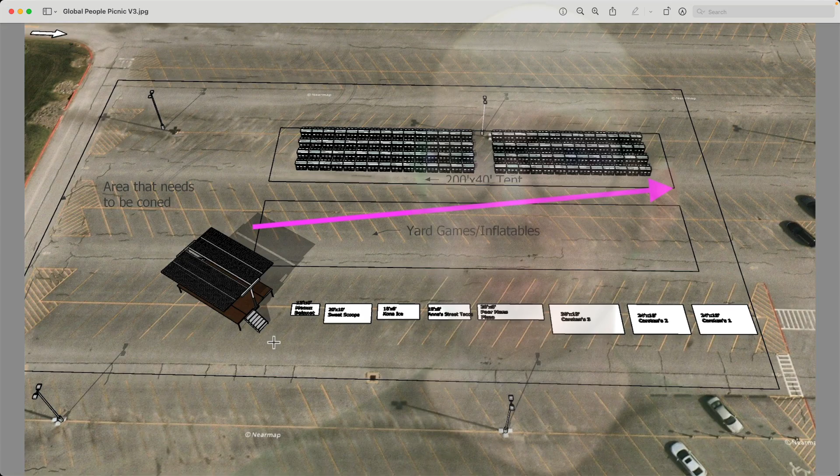Okay, so let's talk about this show. So I was in Bentonville, Arkansas. We were in this parking lot, and I basically had a narrow range to cover. So this will explain some of this right away. So here is this area where it says yard games. This is the area we pretty much need to cover. And in general, they told me they wanted to stay out of this area because this is where people are ordering food, and there could potentially be a lot of people that are English as a second language. And so they wanted to keep sound off this area.

Here's the stage, obviously. And then I think they also kind of wanted to leave this area without too much sound. Number one, because there's a big canopy covering it anyway, so it'd be hard to get sound in there. And number two, because people are in there talking. So really, this was the main area to cover, right? This strip. So hopefully right away that sort of explains to you why I went with one big long line array instead of two, because I just have this one strip to cover.

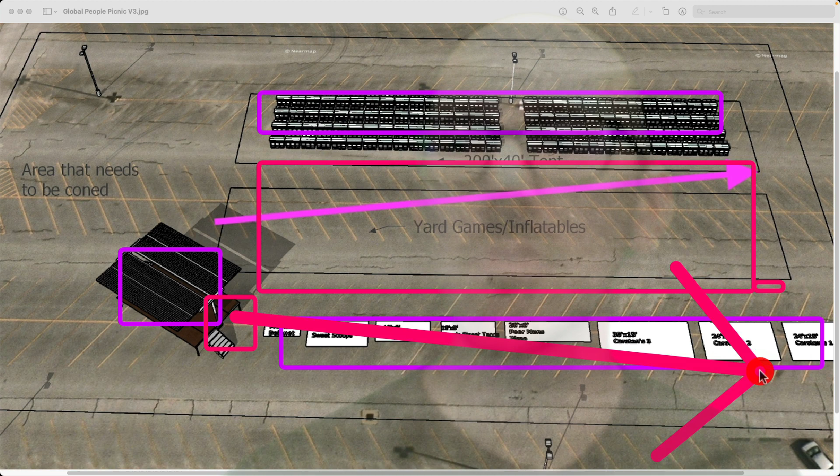Like, I'm not going to put a line array over here and cover this area where there's no people, or over here where there's no people, because we want to avoid that area. So instead, one big one. And if I had two, I would have had to sort of cross them across each other, and that still just makes it too wide. So that's why I went with the single line array.

Now let's talk about the subwoofer array. I was excited to get a chance to try a horizontal array again. I hadn't done it in a while. I almost always go with a gradient array for various reasons that I think I've discussed in other videos. But with this one, I thought a horizontal array would be helpful. With your cardioid arrays, you're sort of limited, in my experience. There are some different variations, but with your gradient arrays, like I like to use, you're sort of limited in how narrow you can get.

But with your horizontal arrays, you have a huge amount of flexibility with the coverage shape, right? Now there are some other drawbacks, but this is what I was initially thinking. Let's try a horizontal array. Let's see if I can just cover this strip. Won't that be cool? Ultimately, this became a problem, but actually, let's just talk about that now.

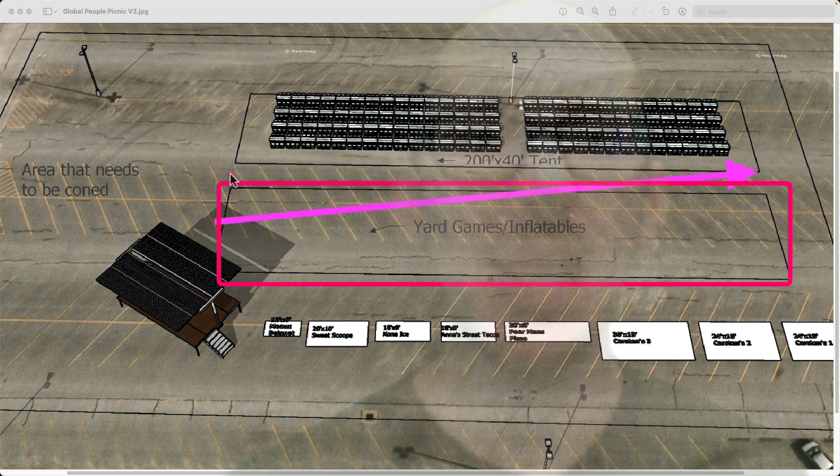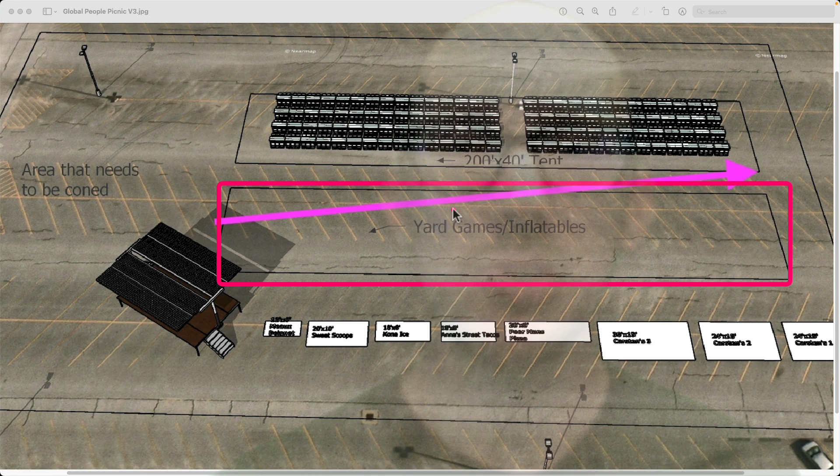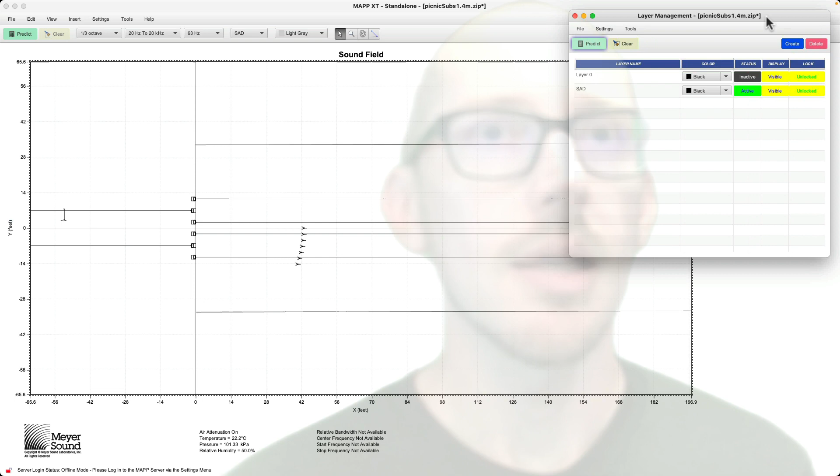So long story short, I'll tell you where we're heading with this: I was able to hit this target coverage shape with my subwoofer array, but of course my main array isn't this narrow. It's a 100-degree array, and so let me just right away give you an example of what that might look like. So here in MAPP XT, oh, I guess I deleted it. So let me just put in a 100-degree speaker.

So if you insert an individual speaker and you go all the way to the bottom under the discontinued products, then you can find a Melodie. Where is it? Legacy products, right? And I don't know why it's rotated like that.

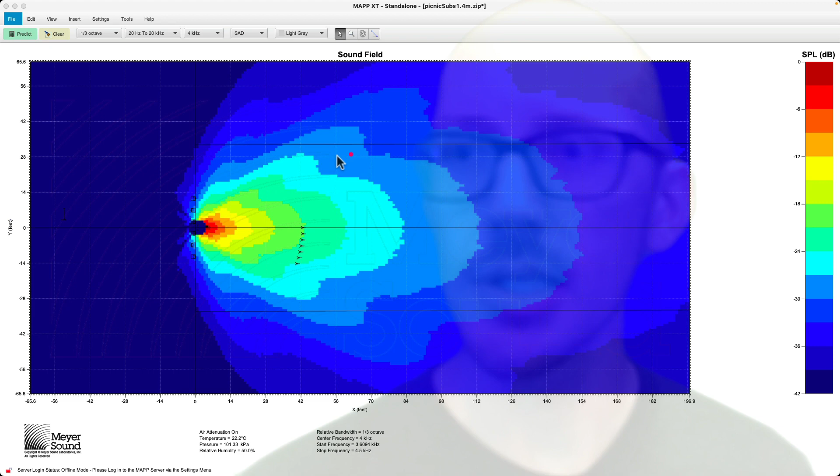So I put that in, and if we just hit predict real quick at 4K, then you can get a sense of what a 100-degree speaker might look like against this coverage shape that you see defined here by this rectangle. So if you look all the way here at the end at 200 feet, and then you look at this color of blue, and you head out this direction, it's covering way past these lines, right? So if you imagine that this is the shape here that I'm trying to hit, we can see that this color goes all the way out here.

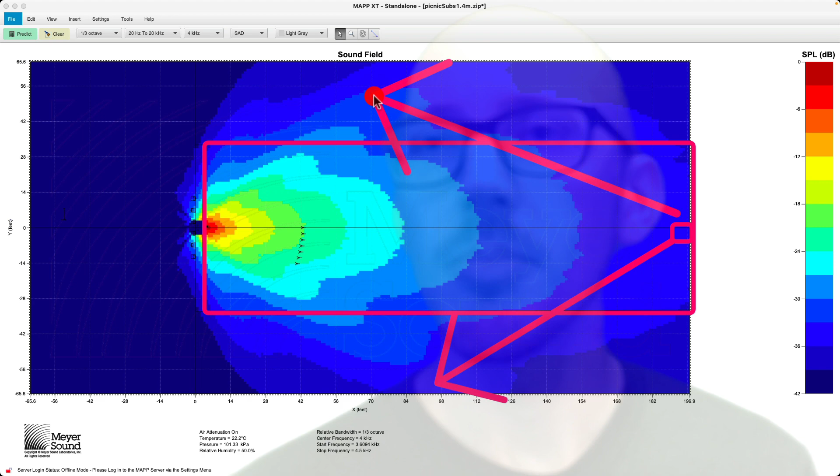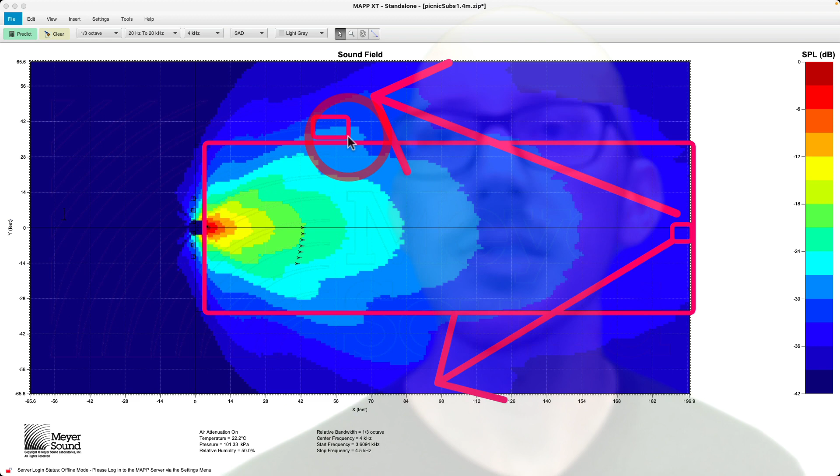And now keep in mind that I ended up having to put front of house over, I can't remember exactly the depth, but I think it was like over here somewhere. So I'm still pretty much in the coverage of the mains here, right? Not so with the subwoofer array. So I thought this subwoofer array was such a cool idea, and it did end up working out, and I'll just give you a quick demo of that. So let's go down to 63 Hertz.

So this was really cool because I was able to not only hit this shape, but also just experimented with turning around two of these subwoofers and making it a gradient array, you know, in landscape mode. And I thought it worked pretty well because the stage ended up being right over here. And so a big portion of the stage here ends up being in this cancellation area. So that was great, but the shape was so nicely fit that then when I was over here at front of house, I couldn't hear the subs at all.

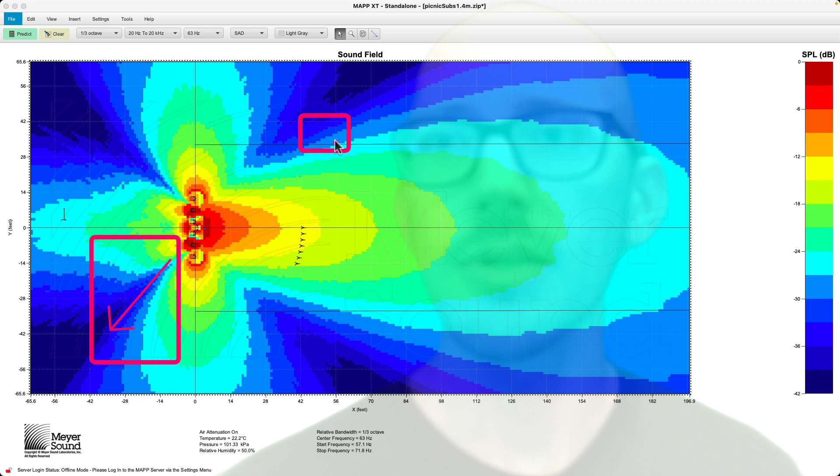And right now we're just looking at 63 Hertz. So you can imagine as we go up in frequency, it's going to get even more narrow. And so it ended up being a really tough day for me in terms of mixing because I couldn't hear the subs at all. So it sounded totally different if I would walk over here into the coverage area. It sounded really good. It was really nice. And I did have an iPad and I would do that occasionally, but the rest of the day standing over here, I just had to know like it didn't sound quite right.

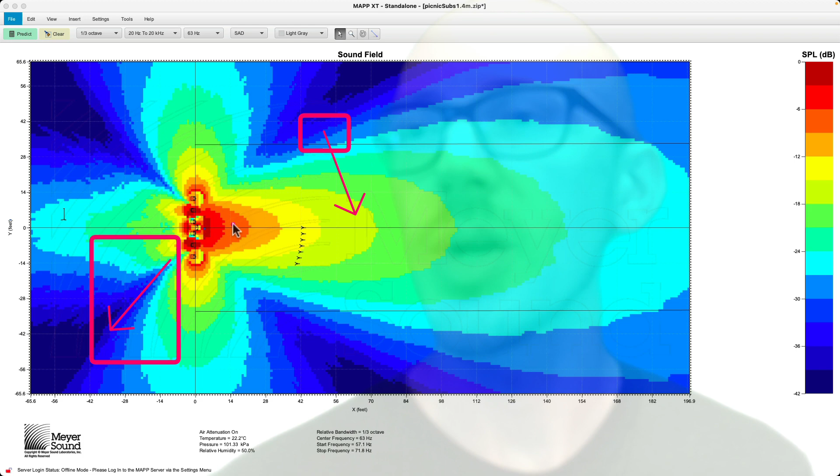So the moral of the story is that yes, I was able to hit my coverage area here with this particular loudspeaker array, this sub array, but it didn't match the rest of the system. And subwoofers don't exist in a vacuum, right? They have to connect with the rest of the system. And so, as we saw earlier, my main speaker array was covering farther out to here. And so over in this region, the whole system starts to fall apart because we're not covering both the subs and the mains in the same width.

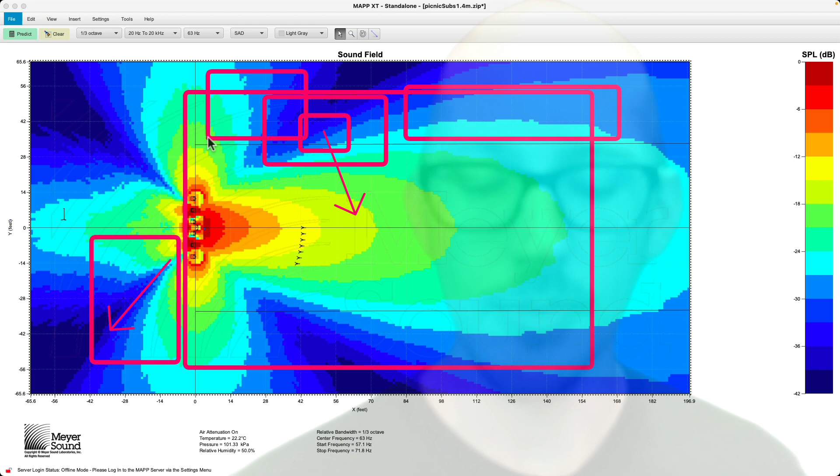Okay, so that was probably the biggest, most obvious thing that sort of went wrong for me that day. But let's walk through how to design the subwoofer array and you'll see where I did some other things wrong. So let's open up Merlijn van Veen's subwoofer array designer.

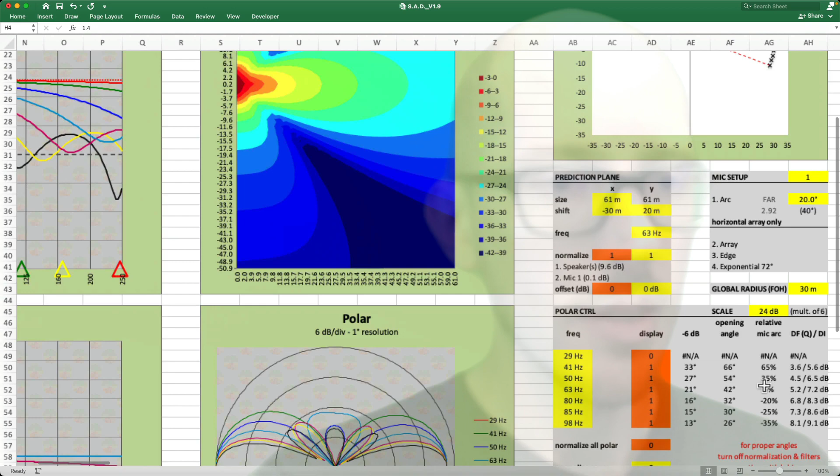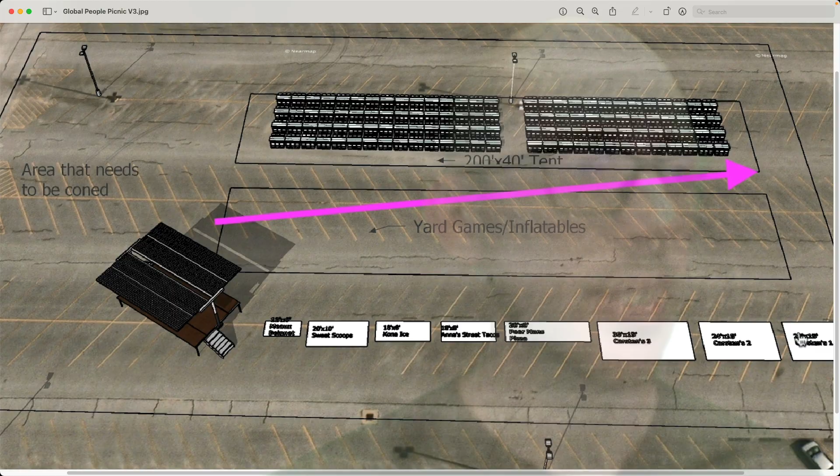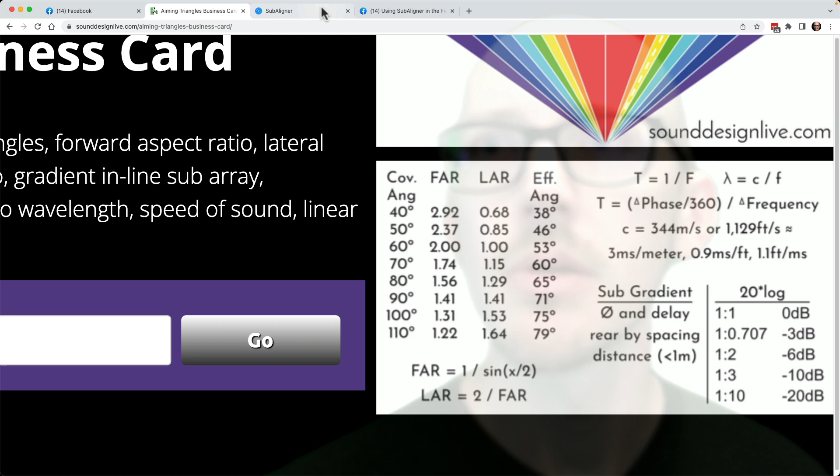Why isn't this the whole story? Well, what's going to happen later when I turn this subwoofer up, right? So if I turn the subwoofer up 6 dB like this relative to the main and create like this haystacking effect, this is the plot in Subaligner, by the way. This is not the same subwoofer, but it's similar. So this is just illustrating a story here that if you turn the subwoofer up, of course, then relative to the main, more of these high frequencies will be exposed. So although the operating range says 100 Hertz, I'm exposing more of those here. And so we're still going to be hearing these. These are only 6 dB down in relationship to the main.

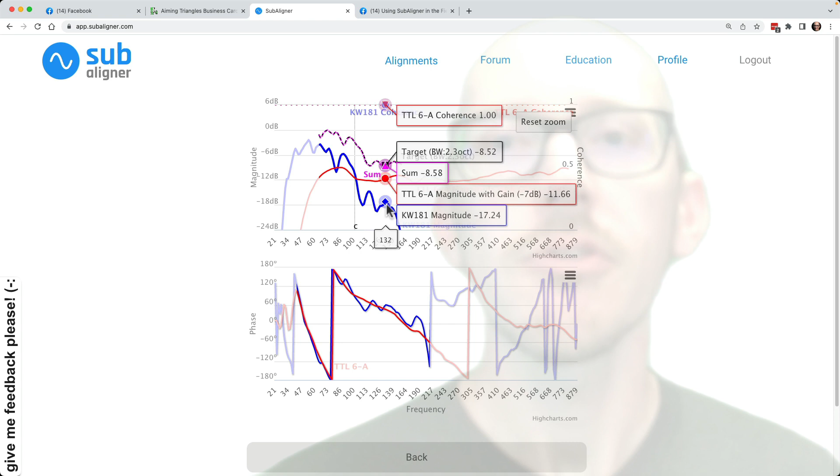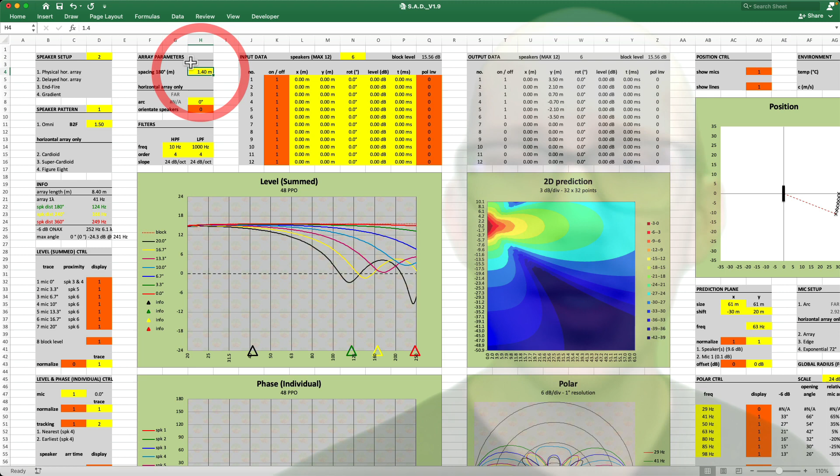So this is another thing to consider when doing these designs. How much are you going to turn up the subs when you actually get into the field? And therefore, do you need to consider higher frequencies in that subwoofer array? Okay, so I need to zoom back out so we can see everything here. Now, I'll just give you a quick demo. Let's say that this started at 1 meter. And then down here, I can see that 63 Hertz says it's too wide relative to the mic arc, 50%, positive number. So I start going up. 1.1, I'm still looking at this number down here, 35%, so I'm getting closer.

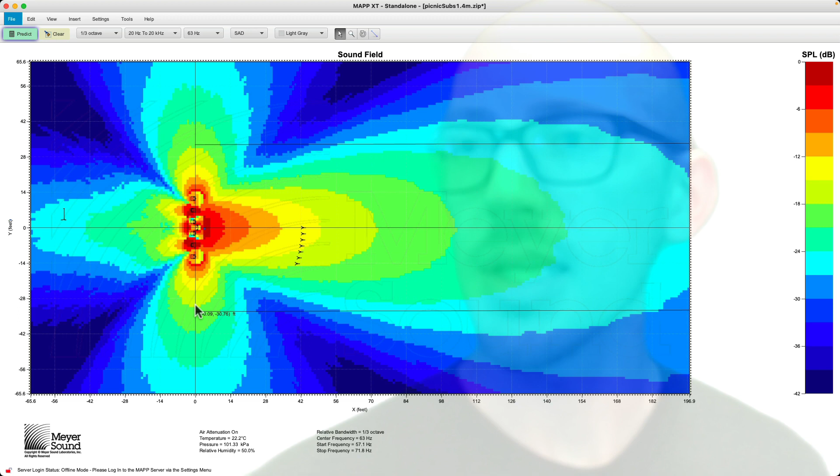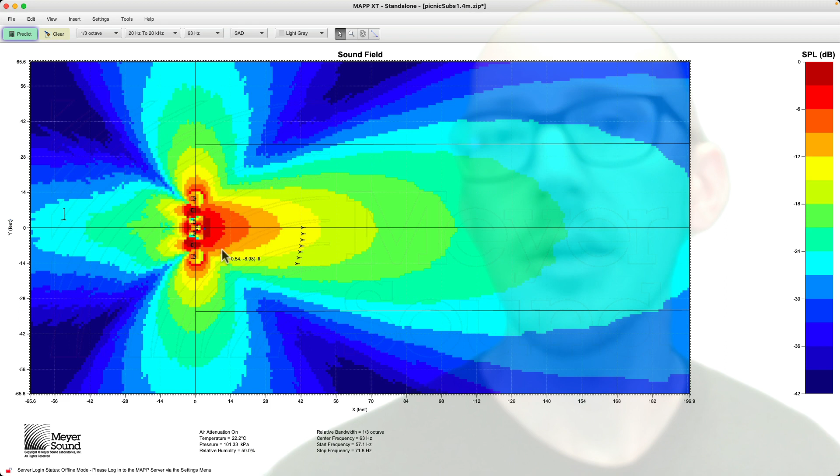1.2, 1.3, I'm getting closer. 1.4, 5%, really close now, 1.5, and I've gone over. So it's in between 1.4 and 1.5, so 1.45 is right on the money, 0%. So I've perfectly matched 63 Hertz. And so I'm thinking, great, so this is where I went with my design, and then I exported this, imported into MAPP XT, and I saw that it worked, and then I started experimenting with turning these subwoofers around and trying to combine an inverted gradient stack here. And this is what I deployed in the field, and I've already sort of talked about the results.

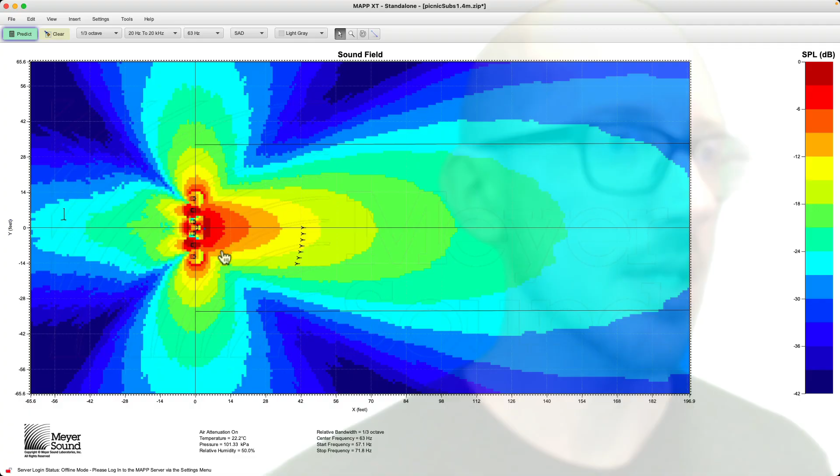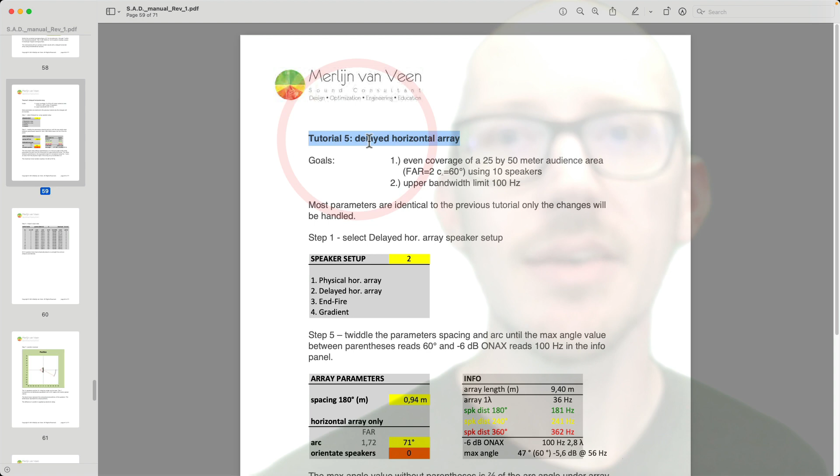So let me go back and show you how I could have done this a little bit better in Subwoofer Array Designer. So where I typically make mistakes is when I try to go too fast. Some of you may be familiar with that as well. So if I had actually opened Merlijn's guide here, tutorial 5, delayed horizontal array, I would have discovered the mistakes I was making. So let's go through this together so that if you ever have to do this, maybe you'll avoid some of the same mistakes I made.

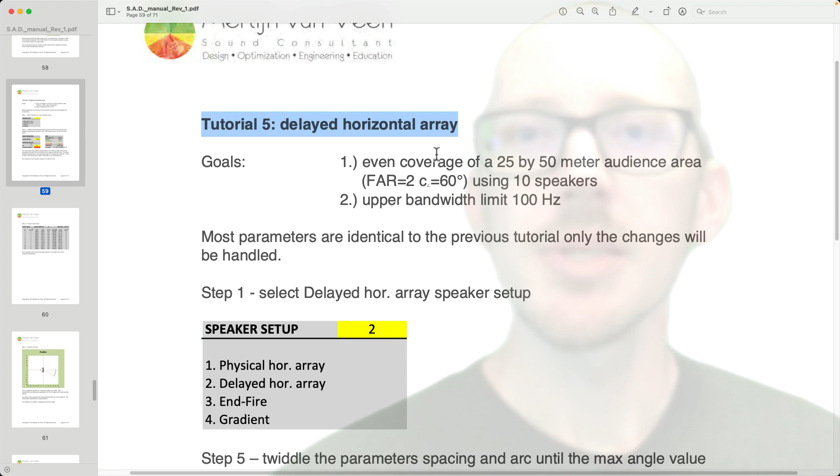Okay, so he talks about forward aspect ratio. We did that already. I know I'm going for 40 degrees, forward aspect ratio of 3. My upper bandwidth is also 100 hertz or 98. And we talked about how that's relative to how much I turn the subwoofer up later on. But let's just go with 100 hertz or 98 hertz now, so I think I went with 98. Just to move along with the video here.

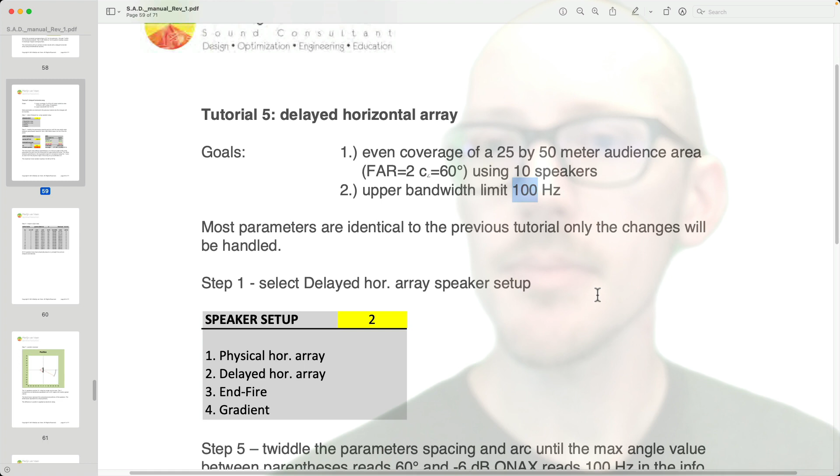Okay, so yep, we selected number 2, delayed horizontal array, and then adjust the parameters of spacing and arc. So this is the part that I skipped. I forgot that you could adjust the arc, because in my mind I'm thinking this is a delayed array, so there's no physical arc, but of course when you select delayed array in Subwoofer Array Designer and then introduce an arc, it just adjusts the delay times.

It doesn't actually make a physical arc, but I forgot about that. And then adjust that until this number is 60 degrees and this number is 100. So in my case, I need to look for this number to be 40 degrees and the other one to be 98. So back over here in Subwoofer Array Designer, that's what I did. So let's start with 1 here again.

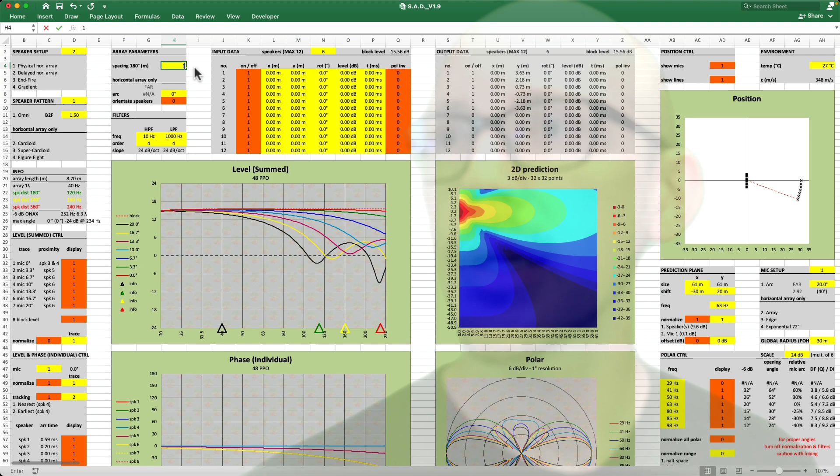You notice I'm starting with an arc of 0. And now I can zoom in more because we just have these boxes right next to each other. Okay, so I'm looking at this number, 0 degrees, and this number, 252 hertz. So let's start turning this up, 1.1. And so I see that this number doesn't change at all, so I need some arc in here, right? So 10 degrees. Okay, there's 14 degrees.

What am I heading towards? I'm heading towards 40 degrees. So let's go ahead and put 40 degrees in. And there we get really close. And now let's start adjusting this some more because we want to head towards 98 hertz here. I'm going to go ahead and jump up to 2 meters and see what happens.

Not always the best idea because you want to see these things change, see how they change as it progresses along. So it actually makes more sense to go like 1.5 and then 1.6 and make sure you don't somehow jump over the target you're looking for. But I played with this already, so I'm sort of just saving us some time by jumping ahead.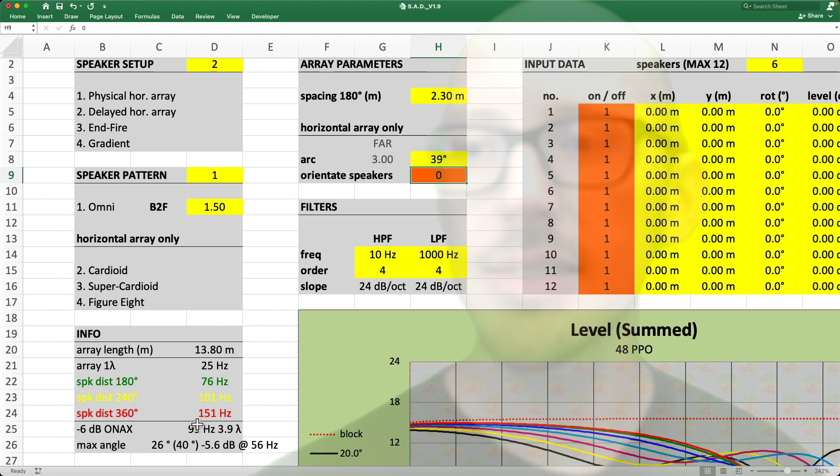Okay, so we're getting closer to 98 degrees. 2.1, 2.2, 2.3. So there's 2.3, and there we go. So I've got 40 degrees and 99 degrees, almost perfect. I can see that the tonality sort of comes apart and then comes back together here at 100 hertz, right, or 98 hertz.

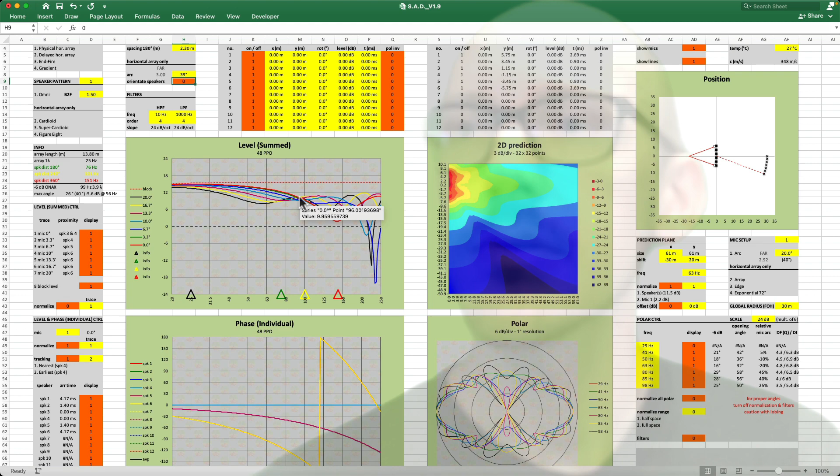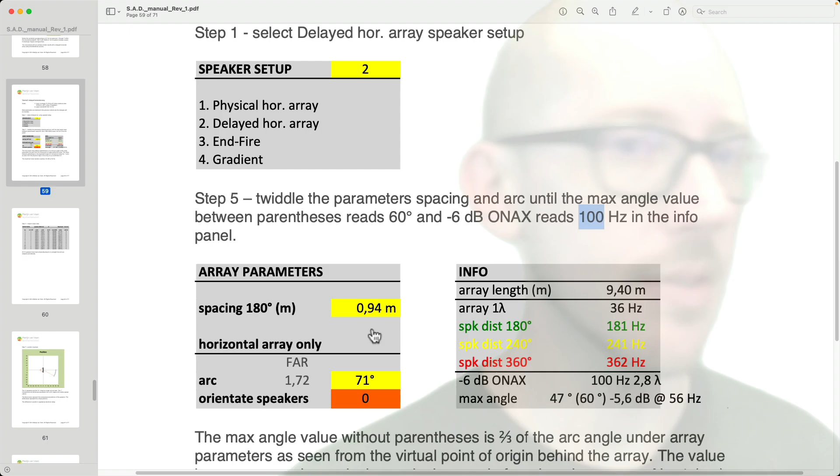And another interesting thing to notice here, notice that I've turned on all of the polar plots for my operating range from 41 to 98 hertz. Now they all match a lot better than they did before. So now that I'm using arc and spacing, I can get a lot better match across the operating range than I did before. So let's continue with this tutorial.

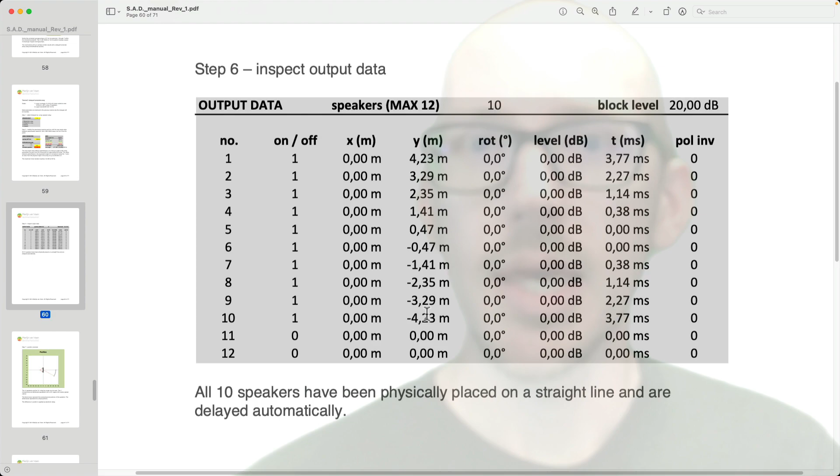Okay, you should read this. I'm not going to go through that right now. So we should look at the results, right? So we go up here and we see that, yes, in fact, it's all just spacing and delay values. Delay values over here. So Merlijn says if you normalize all of the microphones to number 1, you'll see that tonal variation within the intended bandwidth falls within 6 dB.

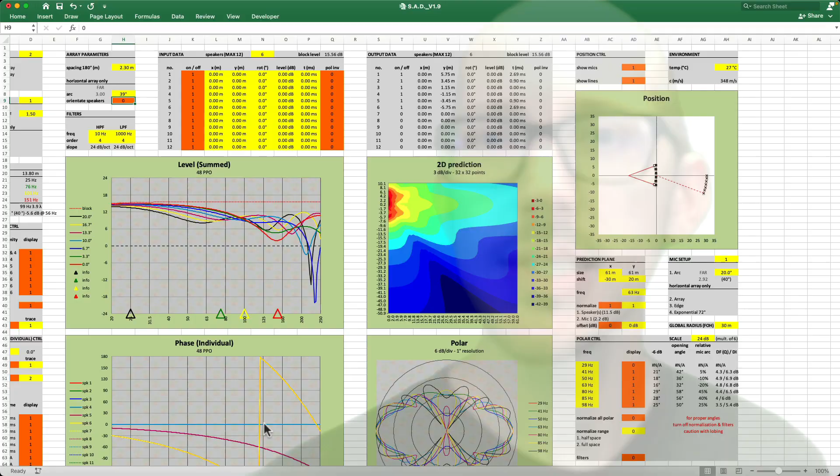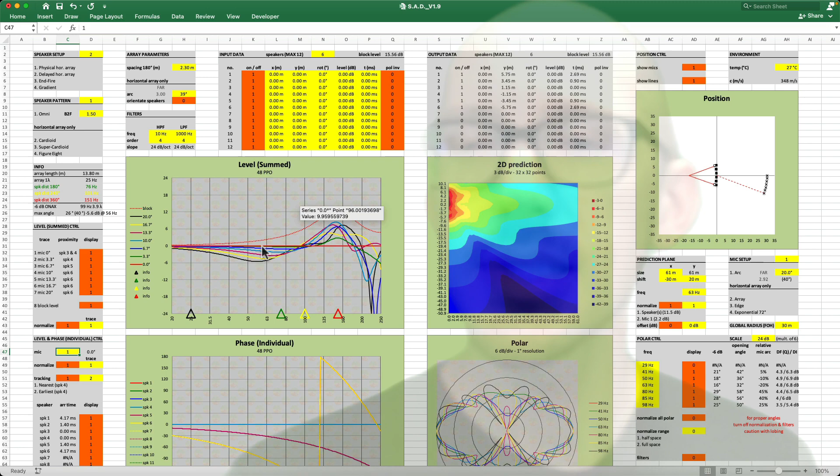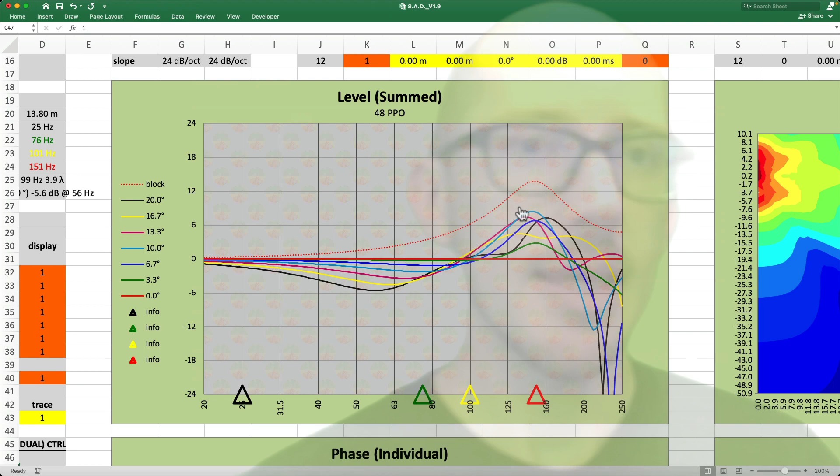So let's try that. So over here, I've got all the microphones on and I can normalize to microphone number 1, and we see that that is in fact the case, that everything is within 6 dB, right, from 40 to 98 hertz. And now let's take a look at that polar plot again. So if we zoom over here a little bit, we can see that everything worked out pretty well.

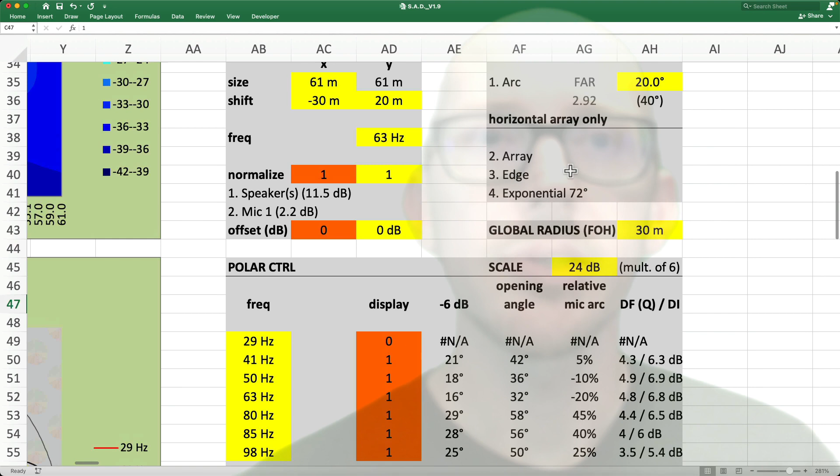So my target here is 40 degrees, and if we look at the opening angle here, 42, 36, 32, 58, so we're under on this side of 63 and over on this side of 63. So we can see that following this method, we get the operating range kind of centered within this opening angle.

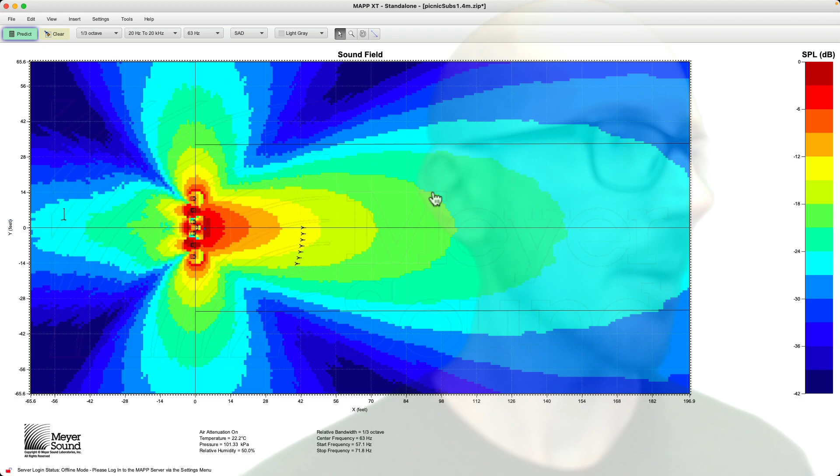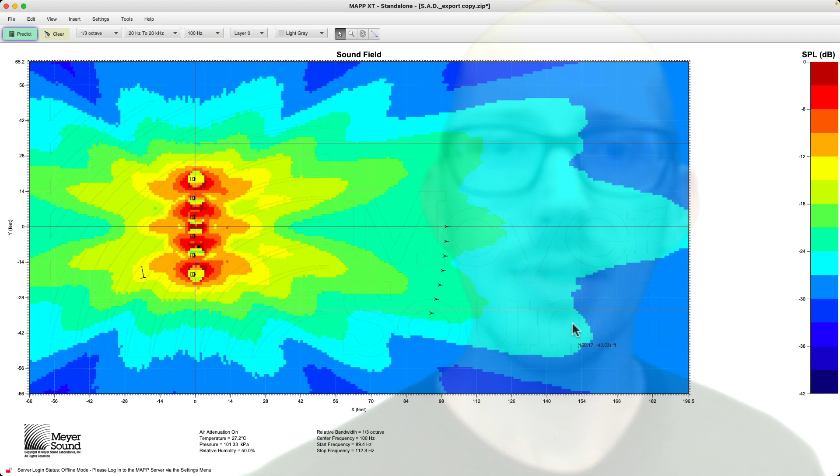And then you can export it to MAPP XT. I've got that open over here. And then you get something like this. So I already have a prediction here. Let's turn off these center lines for a second. So we're looking at 100 hertz, and I'm impressed at how this is still pretty well maintaining the shape. And if we go down in frequency, we'll see that it does a pretty good job of maintaining that shape as well.

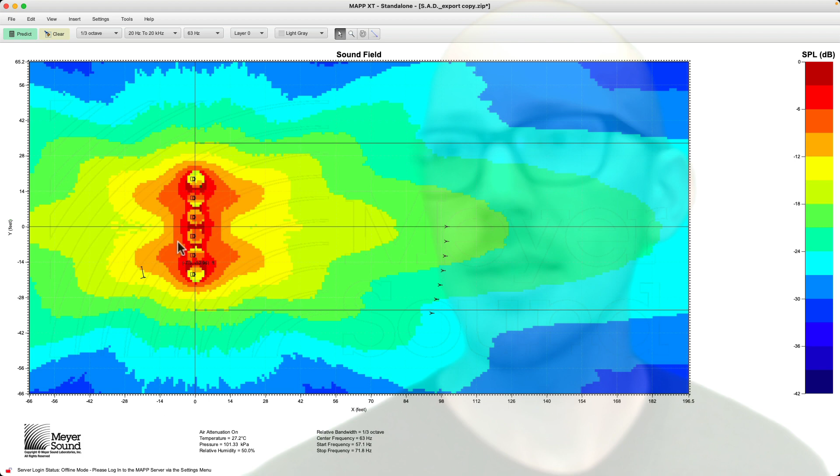Now, I did try turning these subwoofers around and playing around with it a little bit. I didn't get very far. I think if I really wanted to make this a directional array, then I would need to double the number of subs, put 6 more subs behind here, and then I would have a gradient array with a horizontal array. Or I guess I could try to do it with 3, but the spacing would probably be too wide.

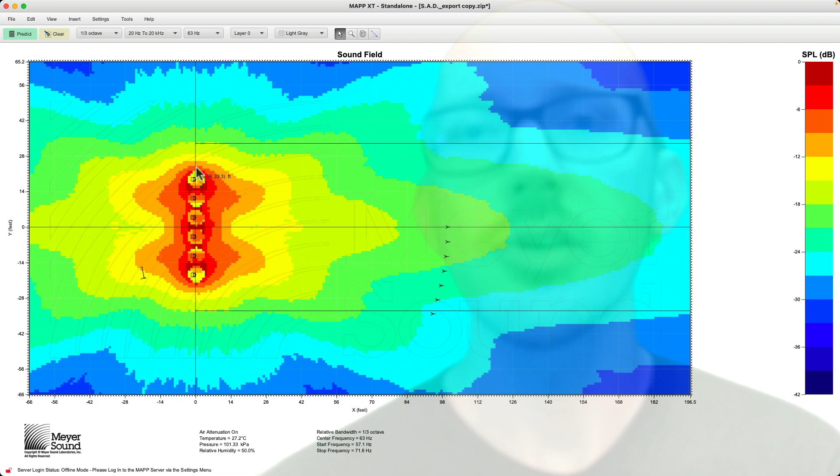So if I did the show again, I would probably just go with this subwoofer array, and I might investigate a little bit about how to make this directional, see if we could get more subwoofers. But now that I've gone back and looked at the tutorial in the guide to Subwoofer Array Designer, I kind of saw where I went wrong and how I could have had more consistency here.